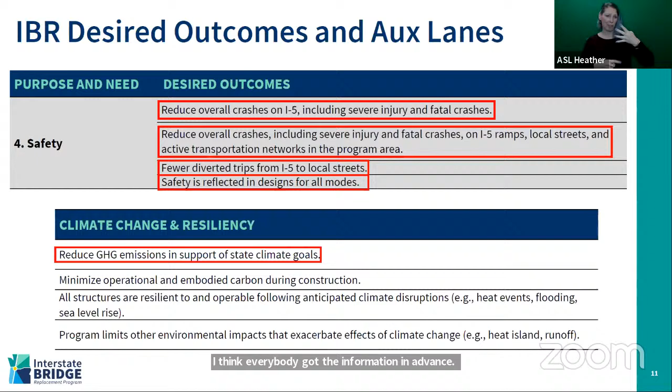Stop for a quick second so the public can see it. So we have the top 4 main purpose and need items. We then have the climate change and resiliency section added here on the bottom. And if you go to the next slide, we have some equity desired outcomes, which again I've highlighted. I'll go through these quickly today. Next slide.

So we acknowledge that ramp-to-ramp connections are not the only way to address these outcomes. In this meeting we're going to focus on the data specific to auxiliary lanes, but we understand there's an overall program approach that looks at a variety of strategies to address these outcomes. For example, in doing some of this analysis, we're already starting to look at how ramp meters and specific ramp metering freeway-to-freeway connections can help reduce congestion and some of those takeaways.

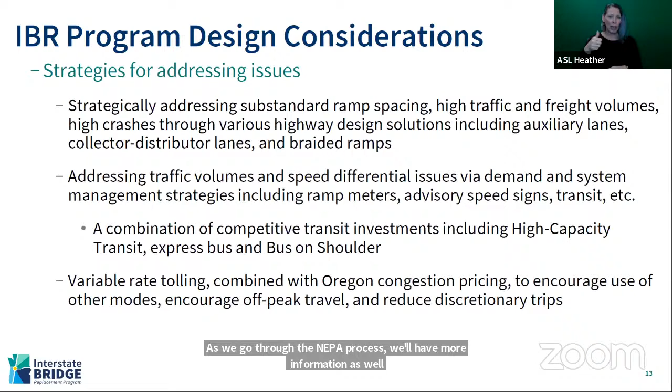So here's an initial list of some of the strategies we anticipate using to address some current purpose and need issues, and some combination of solutions are identified here in the second bullet, including the third bullet with variable rate tolling. As we go through the NEPA process, we'll have more information that'll dive into station access, active transportation potential, trip potential, and additional information on interchanges and ramp information.

That'll be some ongoing work done over the next year. Next slide, please. So now I'm going to get into some background information and traffic design information related to current baseline conditions. Then I'll get into what are auxiliary lanes or ramp-to-ramp connections, and then into the analysis. So it's a 3-step presentation today.

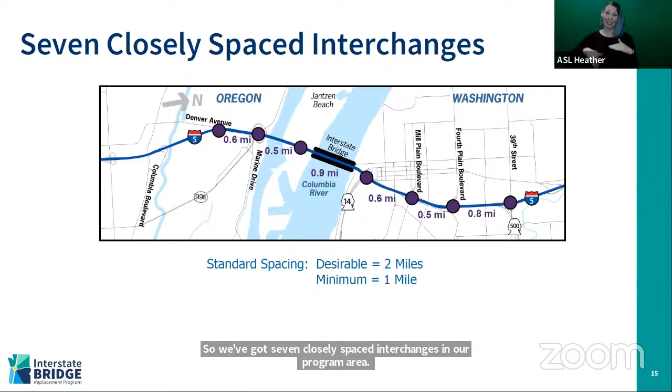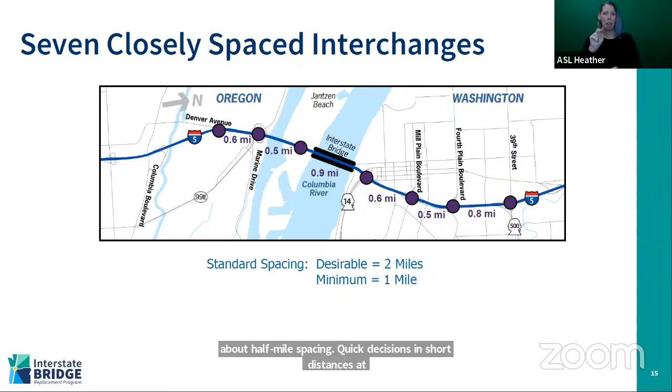Next slide. So we've got 7 closely spaced interchanges in our program area. As you can see, desirable interchange spacing is 2 miles, with a minimum of 1 mile. All of our interchanges are less than that, with many identified at about half-mile spacing. Close interchange spacing requires users to make quick decisions in short distances at high speeds, including reading guide signs, lane changes, and diverging and merging onto and off of the freeway.

For safety and bridge lift, we've actually collected 5 years worth of data as the standard practice. We collected freight information, transit, active transportation, and origin and destination patterns using the bridge, as well as the interchanges just in our program area.

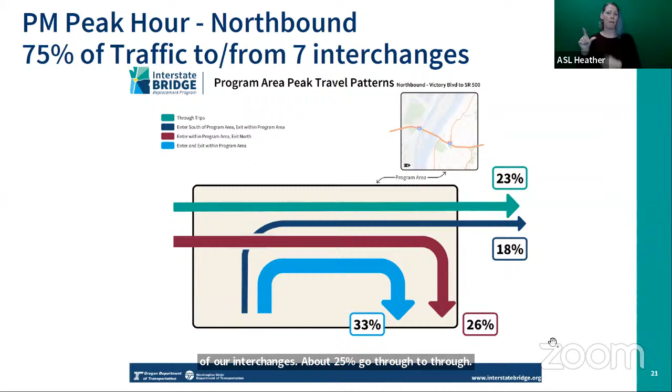Now I'm going to show you some individual ramp volumes. Let me orient you to the graphic. This is AM peak 1-hour volumes. The graphic on the right-hand side shows northbound volumes going up, and the volumes on the left-hand side are the southbound volumes. I've color coded them by ramp type: on-ramps are turquoise and off-ramps are dark blue. The mainline volumes are in black, shown at the top of the screen, in the middle across the river, and at the southern extents. It's important to understand our heavy on and off ramps and which ones those are.

SR 500 at the top has about 2,000 vehicles per hour coming on. Continuing south, Mill Plain brings on about 1,400. SR 14 has about 1,000 vehicles coming on. So really heavy flows coming across the river to destinations south. South of the river, Marine Drive ramp has about 1,800 vehicles getting off, and the Denver Victory Interstate ramp has about 1,000 people getting off. For the most part, AM peak flow is southbound, so I won't talk too much about the northbound flows here.

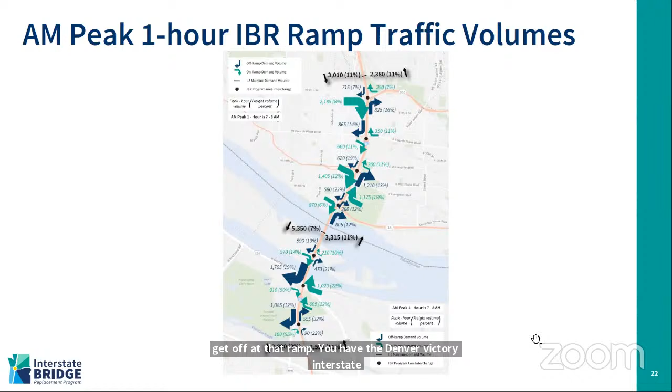Let me orient you to the next slide. These are the existing PM volumes. I want to show you the relative scale of volumes getting on at some of these ramps. We've got a lot of critical interchanges: SR 500, Mill Plain, SR 14, Marine Drive. You can see the relative scale of these flows. These are freeway volumes, not local road volumes - that's the importance here.

Going northbound, starting at the south on the right-hand side of the graph, you've got about 1,000 coming on at Victory Boulevard, and about 1,500 getting on at Marine Drive - full lane worth of traffic coming on at those ramps. Across the bridge, SR 14 has about 1,100 getting off, and the SR 14 on-ramp brings on 1,500. Mill Plain brings on 1,500, and up at the top the SR 500 ramp brings on over 2,000 vehicles per hour. So it's heavy flows getting off - really trying to understand the flows and the patterns.

One other thing to point out: for the most part, AM peaks are southbound and PM peaks are northbound. But there are some ramps that actually peak in the off-peak direction due to their specific patterns or flows. A good example is the SR 14 southbound on and off ramp, which actually peaks in the PM. We use this information to understand the designs needed for the number of lanes at some of these ramp terminals and ramp designs. So I wanted to orient everybody to that. Let's go to the next slide.

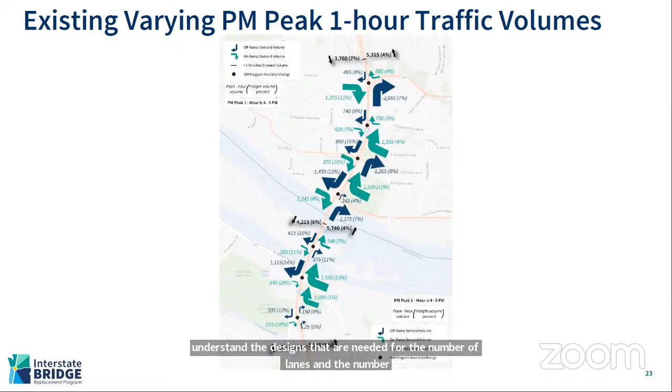Now I want to talk about bottlenecks. We've got 3 bottlenecks that are in the project area or influence the project area. There's a bottleneck at the bridge northbound that lasts 7 hours today, from 12:30 to 7:30. Southbound, similarly at the bridge, there's a bottleneck, but it's only 3 hours. So you've got about 10 hours of congestion at the Interstate Bridge today, in 2019.

The other bottleneck I want to identify is south of our project area on I-5, down near the Rose Quarter and the I-5, I-405 split. There's a current existing bottleneck that actually backs up and influences the project area, so we need to understand that as well. There's about 4 hours of congestion south of the project area that backs up and starts impacting the project area. I'll show you some heat maps or congestion maps later that show this information in more detail.

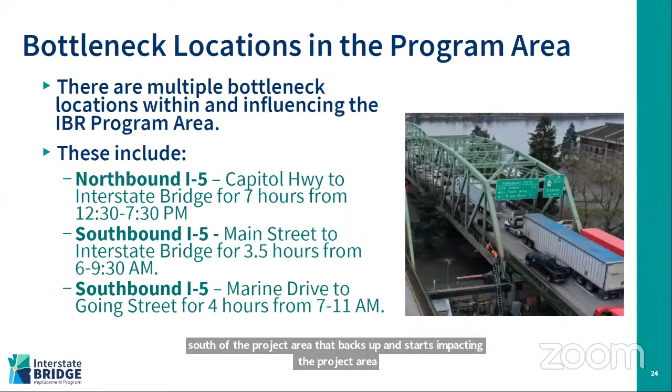The last few things I'm going to get into here in the existing baseline is safety. So we collected, as I mentioned, for our 5-year period from 2015 to 2019, there were over 1,800 crashes.

This is showing you two different charts. We have a chart by hour, how many crashes occurred, summarized by type, and then the by-type crashes on the right-hand side. You start at the top of the pie and work your way around. So rear ends, about 55% of the collisions, are kind of related to heavily congested conditions.

Next, you've got the side swipe being about 20%. Those are related to short merges, weaves, and congestion. You then have the fixed object, about 15%, which are related to substandard features. And then all other crashes relating to bike ped, as well as overturning and other types of crashes, are lumped into that final

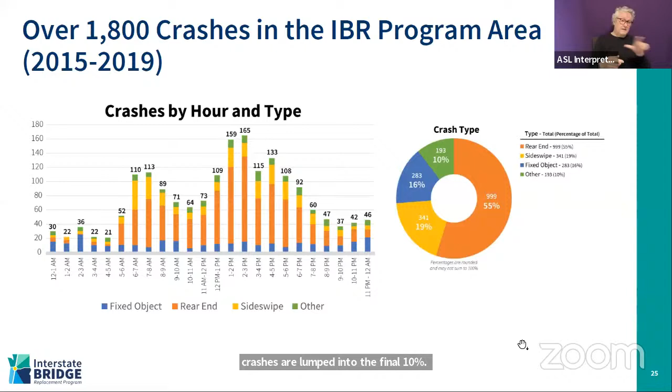10%. The graph on the left shows you how the crashes increase during the congested period. So you see the little AM spike and the PM spike there, where the two little bumps are when the majority of the crashes and the congestion are occurring. But throughout the day, there's quite a few crashes, so about 1,800.

And then we also summarize the same information by severity. So for those 1,800 collisions, we had 7 fatal crashes and 17 serious injury crashes over the 5-year period.

Last slide, please. So the short merge— before you move on, Commissioner Hardesty has a question. I didn't want to interrupt, but if you could go back one slide, please.

You made a statement of fact about the 55% rear ends that is due to congestion. What did you base that statement on?

So I didn't mean to make that a fact. That is a general trend. A lot of rear end collisions, property damage only collisions, are related to congestion. You kind of see the spiking there, Commissioner Hardesty, where on the hourly chart you can see those orange collisions spiking up and increasing. So they typically are related to congestion. So you see that congestion, but even in other periods where there's not congestion, there still is rear end. So I don't want to make that conclusion that is the only thing that causes rear end is congestion. Rear end collisions occur at other times as well.

So yeah, I would say speed causes a lot more rear end collisions than congestion, but I guess that's a conversation for another day. I didn't want that to just be left on the record as if that was fact. Thank you, Commissioner Hardesty.

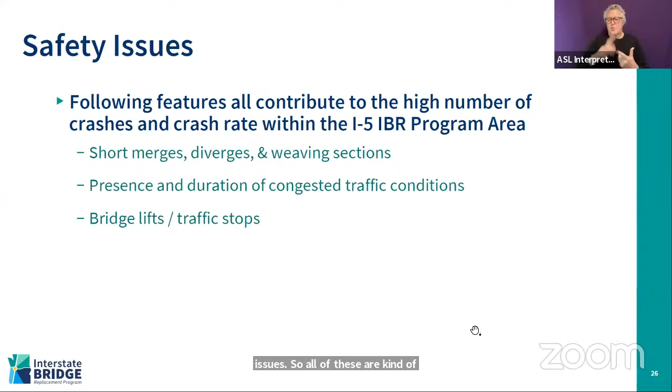So I was going to stop here, Millicent, to see if there's any questions on the baselining information before I continue on. I don't see any hands, Ryan. I'll give folks a few more seconds. I believe we can go ahead.

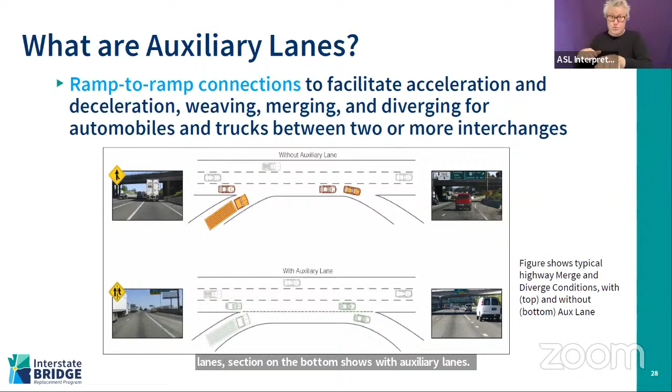We have a section on the bottom that shows you with auxiliary lanes. That same truck and vehicle come on, the truck speeds up in its space and then merges over. I'm going to let the video do a lot of talking for me here. So if we go to the next slide, I've got a video that shows an example for us as well.

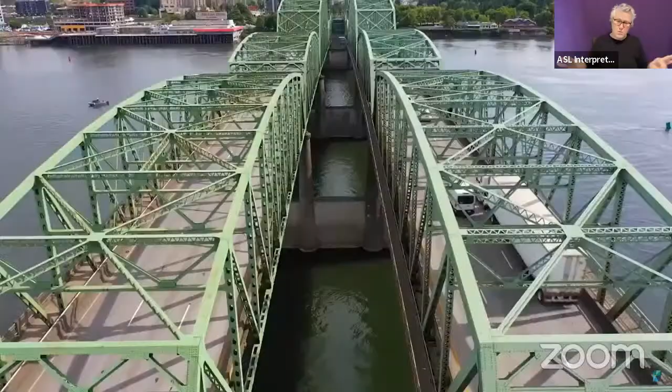The Interstate Bridge provides a critical connection between Oregon and Washington that supports local jobs and families and is a vital trade route for regional, national, and international economies. With over 143,000 vehicles crossing the Interstate Bridge each weekday, the area experiences 7 to 10 hours of congestion, affecting commuters, freight transportation, and public transit.

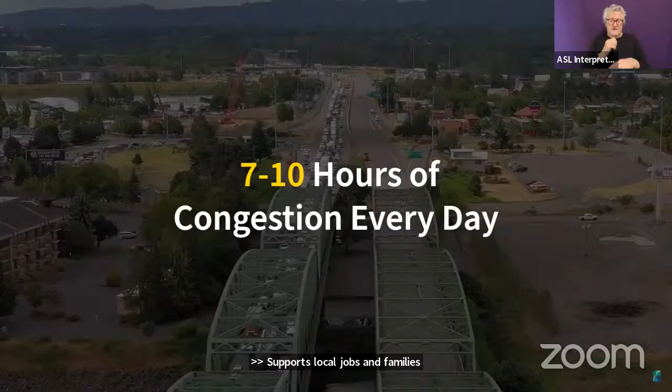Additionally, the area's current crash rate is over 3 times higher than statewide averages, with collisions resulting not just in fender benders, but fatalities as well.

One of the factors that contributes to safety issues and congestion in the Interstate Bridge area is the lack of auxiliary lanes across the bridge and near the surrounding interchanges. Without auxiliary lanes, drivers are forced into through lanes to slow down or speed up as they are entering or exiting the roadway, slowing traffic down and increasing the chance of collisions.

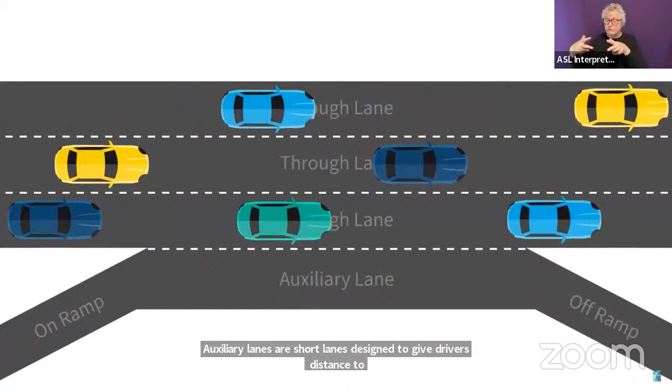Auxiliary lanes are short lanes designed to give drivers distance to accelerate or decelerate before entering or exiting the roadway. They are not through lanes and are not the same as adding an additional lane. They are connections that reduce bottlenecks and optimize traffic flow by giving drivers space to merge safely. This allows for more efficient movement through the corridor, improving safety, helping to relieve congestion with better traffic flow, and reducing emissions from idling vehicles.

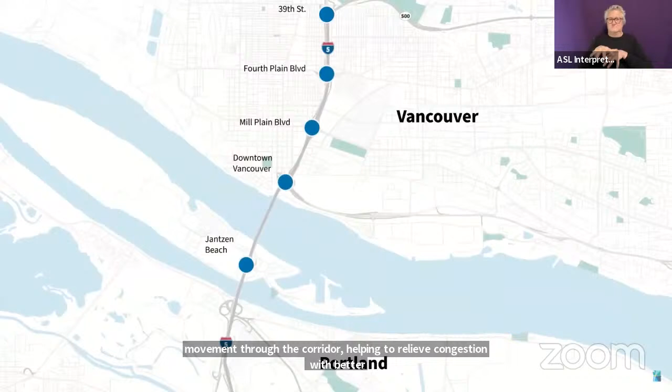There are currently 7 closely spaced interchanges in the Interstate Bridge area along I-5. While the standard spacing for these kinds of interchanges is 2 miles, these interchanges are all less than a mile apart, resulting in substantial weaving and merging for drivers.

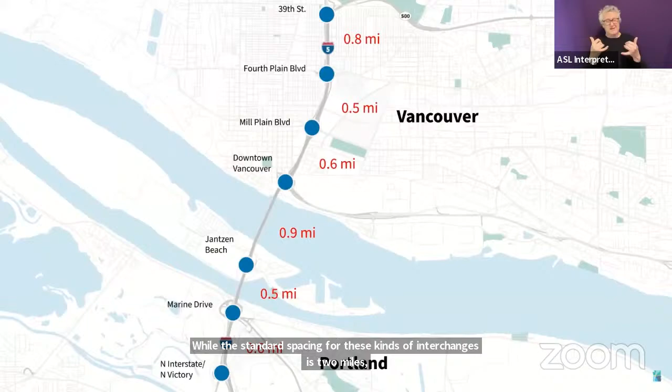Auxiliary lanes are currently being used within the program area, such as along Mill Plain and 4th Plain in Vancouver and Marine Drive in Portland. However, they do not exist on or near the bridge where a majority of congestion and collisions occur.

The Interstate Bridge is a vital piece of infrastructure for our community and the economy. It is imperative that we do everything possible to improve the safety of our roads for everyone.

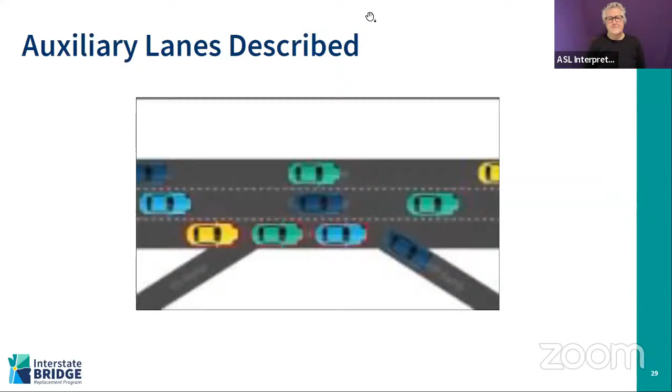So today, the image here kind of shows you an example of context of our program area. The conversation we're focused on today is the number of auxiliary lanes across the river only, but I wanted to show you that they do exist north and south of the project area today.

So in the northbound direction, as the video just showed, we've got an auxiliary lane between Marine Drive and Hayden Island. We've got an auxiliary lane between SR14 Mill Plain, between Mill Plain all the way to SR500. You can see there that it extends beyond one interchange and has 4th Plain add into it in the middle there. In the southbound direction, you've actually got 2 auxiliary lanes that come on at SR500.

As I pointed out, the volumes earlier being over 2,000, that's 1 to 2 lanes worth of volume. So they bring on 2 auxiliary lanes in that location today due to the short spacing between SR500 and 4th Plain. It actually drops one of those auxiliary lanes at 4th Plain. You then pick up a second aux lane again at 4th Plain and drop both of those at Mill Plain.

Similar to continuing south between Mill Plain and SR14, there's an aux lane. Again, nothing across the bridge, only 3 through lanes. And then south of the river, you've got between Hayden Island and Marine Drive, there's an aux lane, and between Marine Drive and Victory.

So wanted to show you that these exist throughout the project area as well as the Portland metro region. There are examples down on the I-405 bridge in downtown Portland, as well as other locations up in Vancouver that have examples of auxiliary lanes. So I wanted to show you these are a common practice that is used in the industry with short interchange spacing.

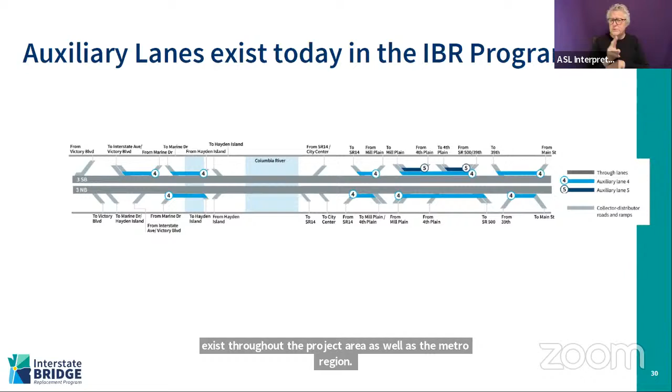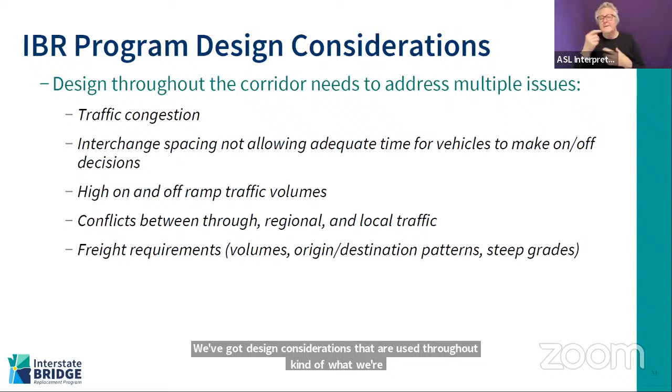Next slide. So I wanted to read through these for you. So we got design considerations that are used throughout what we're thinking about for the IBR program and why we're considering aux lanes and other features to help deal with those baseline issues that I showed earlier in the presentation. We got traffic congestion, about 10 hours today at the bridge.

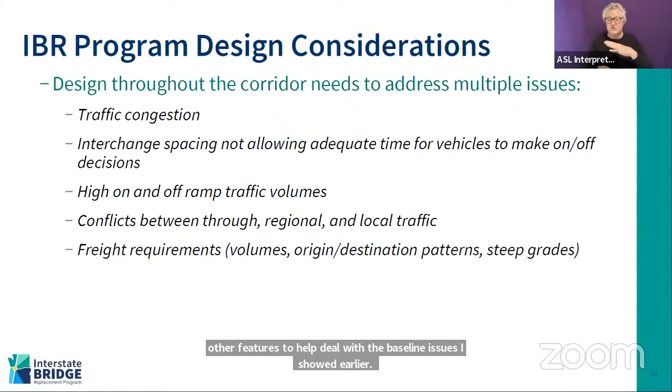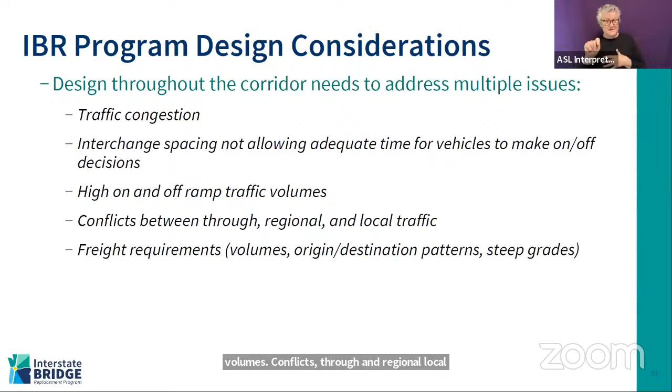We've got the interchange spacing that doesn't allow adequate time for vehicles to make on-off decisions. We've got heavy on-ramp traffic volumes, conflicts between through regional and local traffic, and freight requirements and volumes with origin-destination patterns different from commuters, plus the importance of Mill Plain and Marine Drive for freight.

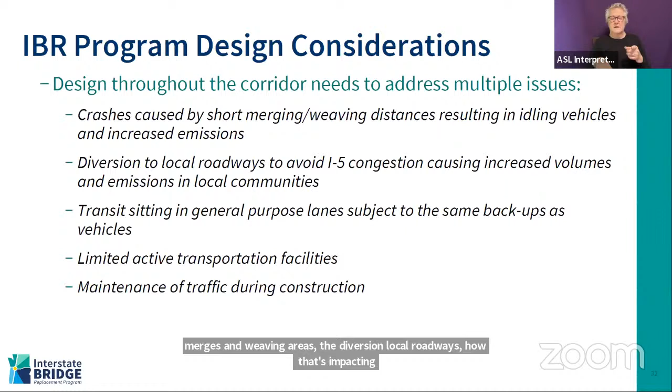We've got crashes caused by short merges and weaving areas, diversion to local roadways impacting local communities, transit sitting in general purpose lanes like single occupant vehicles and caught in the same backups, limited active transportation facilities, and maintenance of traffic during construction, all of which need to be considered in our potential IBR solution.

I'll stop here and see if there are any questions on ramp-to-ramp connections or auxiliary lanes. I don't see any questions, so let's keep moving. All right, perfect, let's go on.

Auxiliary lanes for the IBR are proposed to address close interchange spacing, as most are about half a mile apart. We've got short merges, weaves, and diverges. An example is the Hayden Island on-ramp, which has about 150 feet of acceleration length, while the standard is 1,500 feet—so you get about 10%.

What occurs there is vehicles come on and have to make quick decisions. Often vehicles stop on the ramp or on the freeway to allow merging to occur, which leads to a lot of our collisions in the program area.

We've got high on and off ramp volumes—I've shown you SR500. Another example is Marine Drive, at about 1,400 to 1,800 vehicles per hour. We've got the heavy vehicle crashes I showed you, summarized overall for the project area as well as by location, so we have that information.

The last one is we're trying to minimize the required number of lane shifts needed for vehicles when they come on and are getting off at the next ramp or a state route. So I wanted to identify that as well.

Next, I want to get into future volume predictions. We're using the travel demand model to forecast future patterns. The IBR program uses the demand model produced and run by Metro and RTC for the 4-county region, based on the 2018 adopted regional transportation plan, including projects assumed to occur by 2045, such as the IBR, Rose Quarter, Division BRT Transit, etc. All of those are inclusive in our future 2045 numbers.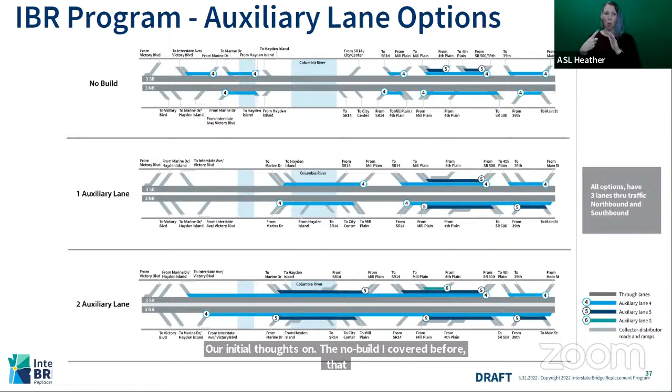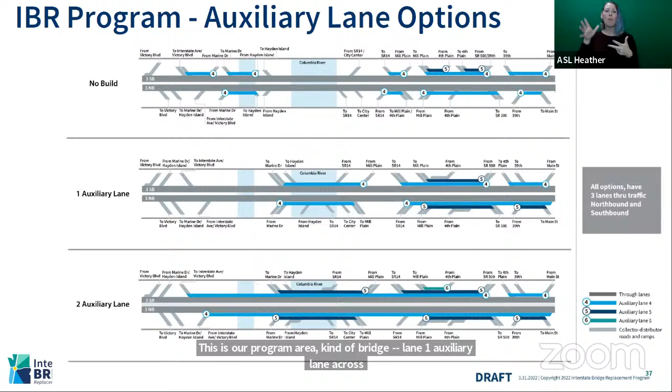We then have a one-auxiliary scenario that has one aux lane across the river—you can see that in the middle, north is to the right, this is our program area again. To bridge, you add one auxiliary lane across the bridge. We then have the two-auxiliary-lane scenario on the bottom section, where you pick up the one aux lane, fill in the gaps, and the second aux lane comes on at Marine Drive and drops at Mill Plain, with the reverse in the southbound direction. So those are the main differences.

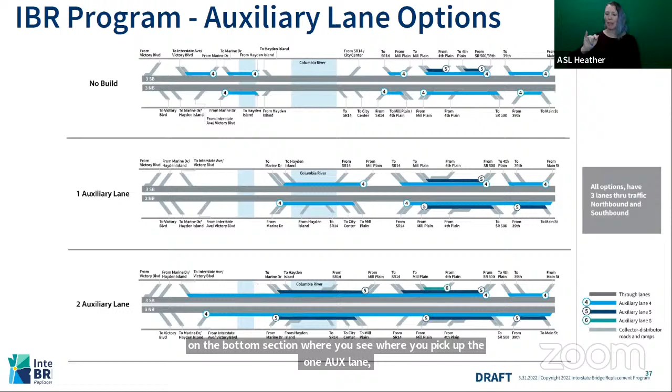I'm going to go into the operations now and the results. So let's go to that, please. There's a lot on here, so I'm going to give us an orientation to the graphic, then I'll get into what the data is, and then we can get to some conclusions after.

So we've got these for a no-build, a one-aux, and a two-auxiliary-lane scenario. On the top is the graphic—this is the no-build, the base case. You can see the map on the top. We then have performance metrics for equity and climate. We have a travel time metric showing results for different pairs. We then have daily mode share as well as PM one-hour mode share in brackets below that. I'll walk you through all this information in a minute.

We then have a congestion index, which relates to the heat maps on the right-hand side. Those heat maps show the speeds vehicles will be traveling through the corridor area. AM southbound is the top row, southbound PM is the second row. We then have northbound split into two sections on the bottom, with northbound AM being the third row and northbound PM the bottom row. Darker red is slower speed—dark red is less than 20 miles an hour, orange is 20 to 30, yellow is 30 to 40, light green is 40 to 50, and dark green is greater than 50. Imagine things like Google Maps showing the speed you're going in an area.

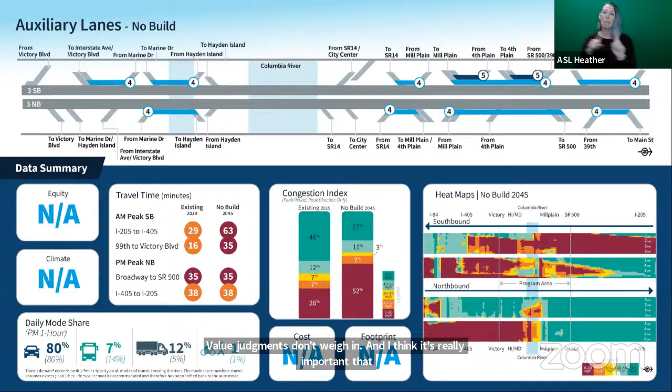Thank you. And Metro, I'll jump in real quick one more time. Metro and RTC have user surveys that they go out and collect, gathering information on how you make choices, Commissioner Hardesty—I need to go from this place, how many trips do I take, do I always take my vehicle, can I take transit, can I take bike-ped? That information is fed into the model, the model is calibrated, and then they predict future changes like you're getting at. So those are assumed in the model—it's not that what was done last year or ten years ago, those patterns must maintain into the future. They do make adjustments, as you're kind of hinting at.

So let's go to the next one. I know we're trying to race through a lot of information, and I'll get into some summaries. I'll just keep orienting us to this, and then we've got some large conclusions. I think you saw in the PowerPoint slide deck that roll these up, but I'll orient us again.

To the aux lane, one aux lane scenario here—again the map is on top, same measures are highlighted. Equity is summarized where you're increasing modal options. You've got climate with some identifiers of change. You've got the daily mode share down on the bottom, showing the change for the one auxiliary lane. You've got travel times again showing existing—now including both the no-build and the one auxiliary lane scenario. You've got a congestion index showing both the existing, no-build, and one scenario. The heat maps on the right-hand side are for the one auxiliary lane scenario.

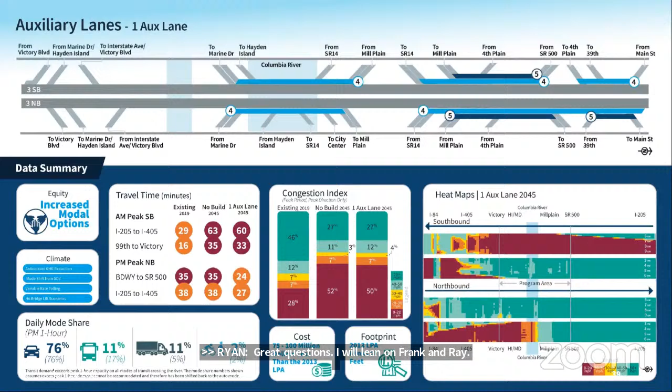Those are great questions. I will lean on Frank and Ray to jump in and help me with that one, but I want to get back to your first one about the impacts to local streets. That is a good point. I did want to point out these are just showing the freeway main lines. There will be backups at the interchanges with these conditions, and we don't have that completely summarized to date, but that'll be information that'll be summarized in the impact analysis, NEPA analysis. That's a good question about the asymmetry question too. So I might let Frank and Ray speak, I know we've considered it and I've been thinking about it. The other thing we need to understand here is maintenance of traffic during construction, so how to maintain operations during construction. That's an important fact that's not on these summary sheets, but we will discuss that for sure.

Yeah, and I'll jump in real quick, Ryan. I think you just summarized it very well. That's what I was going to say, that as we started seeing some of this data, that is absolutely a question that we started thinking about: does it need to be symmetric, or can you look at maybe the benefits of different aux lanes in each direction? I think we need to look at that throughout the corridor. As Ryan said, there aren't the same amount of aux lanes everywhere. So as we're looking at the volumes and moving forward, that's definitely something we're open to studying. So thank you for that question.

We have two more questions. That added a few more questions, yes. Sorry. Secretary Millar, and then CAG co-chair Lynn Valenter.

Yeah, when we have this conversation about aux lanes, I don't think it really ought to be about congestion as much as safety. The video that we saw earlier and all the discussion leading up to this was about aux lanes reducing crashes. It's rather apparent looking at the congestion index that aux lanes don't do a heck of a lot for congestion. So does it reduce crashes there at the bridge?

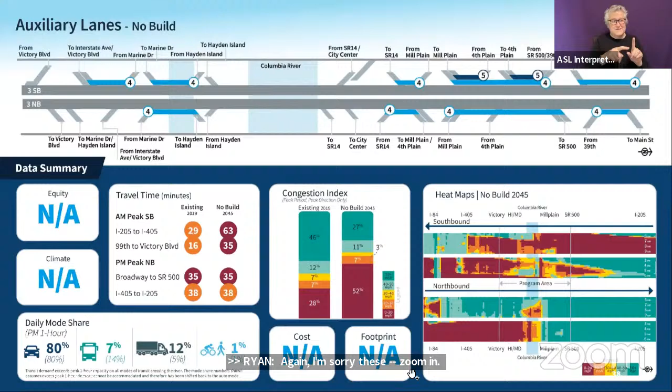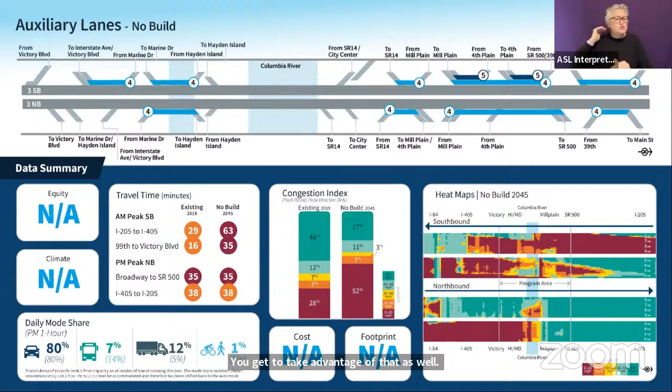So transit demand is over capacity in these. We're providing so much demand that it's more than what can be served. There's a footnote on the bottom noting this is talking about just the amount that can be served. The other thing to note is the no build is an increase over today's transit, since CTran and TriMet are doing a lot of improvements planned out to 2045 no build, so you get to take advantage of that as well. In both of these cases, you're trying to shift more, but there's already too much demand over service, so we've capped these at service. So the service is similar, but there is a difference.

And I think if you look at the peak number in the brackets below, there's a little bit more of a difference, but I agree with you, there is a small shift between the amount that you can serve between the scenarios.

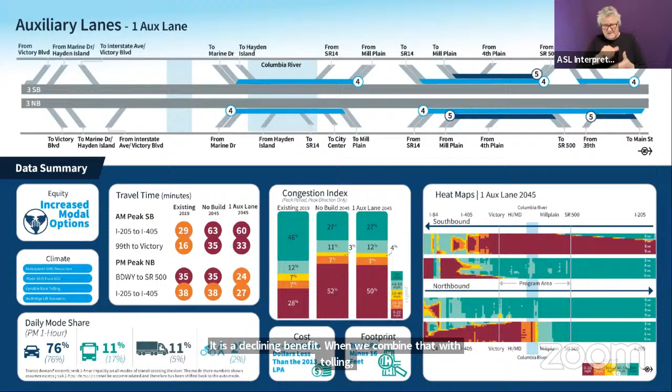So when you add one aux lane, you get a big benefit. When you add the next one, you don't get the same incremental benefit, it is a declining benefit. So when we combine that with tolling, what is the sensitivity on that second aux lane? What is our confidence that it actually has the benefit that we believe it to have? Does that make sense? It does.

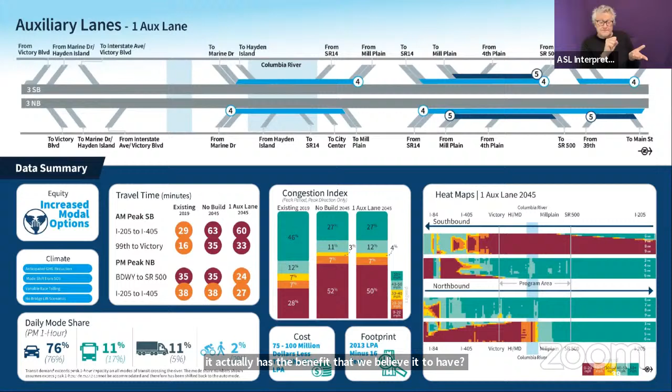I'm going to push you just a little bit. I don't know if they're equal. I think if you were talking through lanes, I would think each through lane would be considered equal, and you kind of go down to the disproportional benefit. I'm not talking through lanes, I'm talking aux lanes, that's what we're talking about right now. The question is the sensitivity of how the tolling affects the need for each additional aux lane.

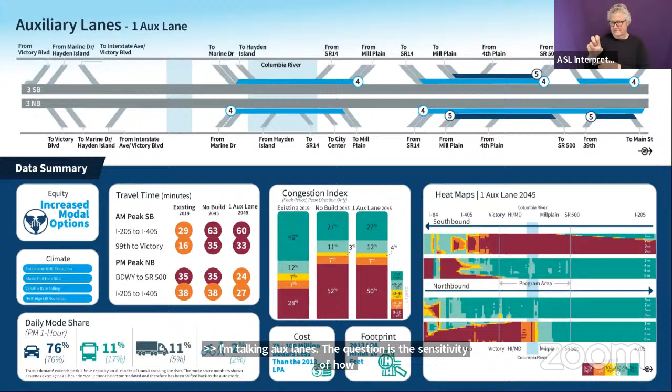Maybe we go to the next slide, and I'll show you the difference between the two lanes. We haven't gotten to the two-lane yet, and I'll show the differences in the heat maps and congestion. Then we can come back to the tolling question. Is that okay? Yeah, thank you. Let's do that, and we'll try to come back and answer your question.

So wanted to get through this. I know we're running behind, Millicent. So this... You're good, you're good.

Okay, so this is the two auxiliary lane scenario. The plot on top shows where those lanes are added and where they drop. We've got the same metrics on the bottom: travel time benefits and daily mode share. The daily mode share is similar between the one-aux and two-aux scenarios, as I discussed, since we're capped out at service. So you get the same general mode share, both daily and peak.

Travel time benefits, you can see the change and improvement with the two-aux compared to the no-build, which we'll go back to and bounce between.

I think we might just skip the bullets and let you guys read them, and go to the overall summary in a minute. But if you look at the heat map in the bottom right corner, the northbound PM peak has a large difference from what you saw in the one-auxiliary-lane scenario. Southbound AM, the top row, is pretty similar, slightly less congestion, but a similar case with the downstream bottleneck backing up to the north. But the northbound PM shows large improvements in congestion, and you see that in the congestion index in the middle. Then in the travel time summary bullets, that's where you see your main travel time savings in the PM peak, and also a small difference in the AM peak timeframe.

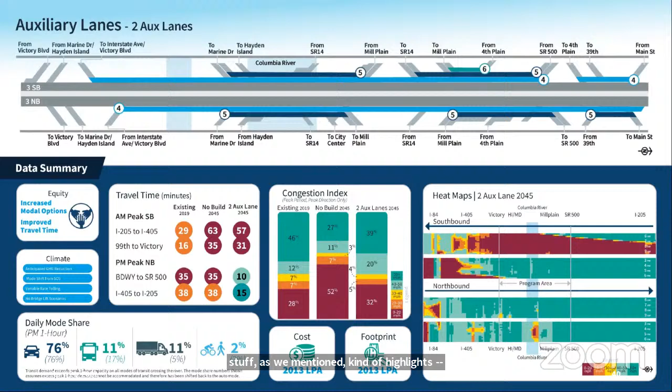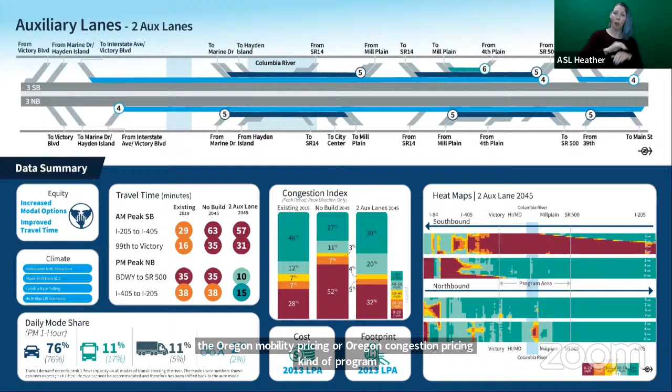So the tolling sensitivity stuff, as I mentioned, I went through the highlights earlier. We've tested different scenarios of higher toll rates, those same two toll scenarios, plus the regional mobility pricing, or Oregon congestion pricing program included. There were main trade-offs where sometimes you reduce volume on I-5, sometimes you actually increase volume on I-5, which gives you that sensitivity you're getting at, President Peterson, about volumes going up and down. The other component to consider is the transit portion, the forecast for transit, and the amount that can be served and demand. So there is kind of sensitivity.

The aux lanes, as Secretary Millar got at, are really trying to help with the safety of the short interchange spacing and heavy on and off ramps. A lot of the volume, as I showed with the origin-destinations, gets on and off at ramps, so there's not a lot of through traffic. I don't know if I'd call it chaos, but people get on, drive through the aux lane, and get off at their next state route—that's their ultimate goal. So hopefully that answers your question.

No, I mean, comparatively, I understand where we are in this study. And I guess as we move through, I'm going to want to see the traffic operations impacts, not just the planning level overview. I think that's going to be really important to zero in on what we need and what we don't need for the future, and what the benefits and trade-offs are. So while I appreciate it, and I know where we are in the study, I think we're going to need a little bit more information to be able to make those trade-offs.

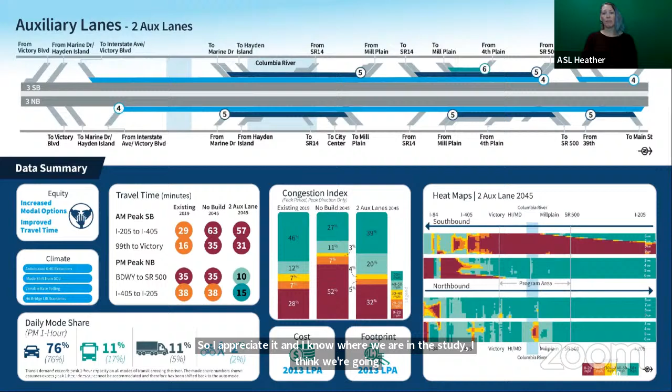These are the main conclusions from either one auxiliary lane or a two auxiliary lane trade-off compared to no build. You get the modal choice benefits of high capacity transit, bus on shoulder, and active transportation. You get variable rate tolling, reduced overall congestion, and off-peak benefits, including weekends.

There's less diversion to local streets, and you get faster congestion recovery from crashes and incidents, with fewer lane changes required. You get the safety benefits of full lane widths matching current vehicle widths, turning and comfort standards, fewer sideswipe crashes, full shoulders to allow bus on shoulder and recovery from breakdowns, improved visibility, and no bridge lifts. Those are some of the major safety improvements in either the one or two auxiliary lane options compared to a no build.

Next slide: benefits of one auxiliary compared to the no build. You get some travel time benefits as highlighted on the previous graphic, and reduced congestion. Congestion is similar, but there's some reduction in off-peak periods with the one aux compared to no build. You get the safety benefits we just discussed, and a modal shift—you can see the increase between the no build and the mode shift projections with the project. You also get climate impacts and improvements from anticipated GHG reduction, and increased modal options for equity.

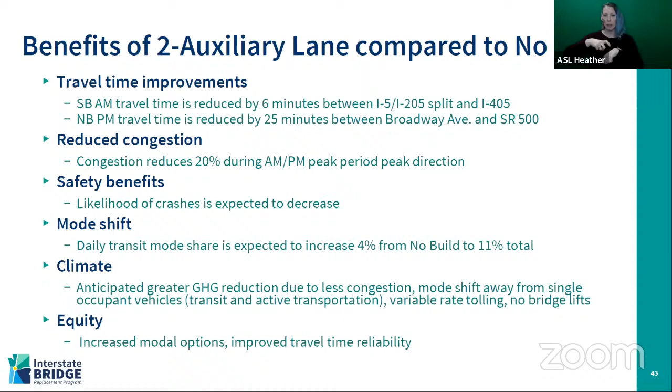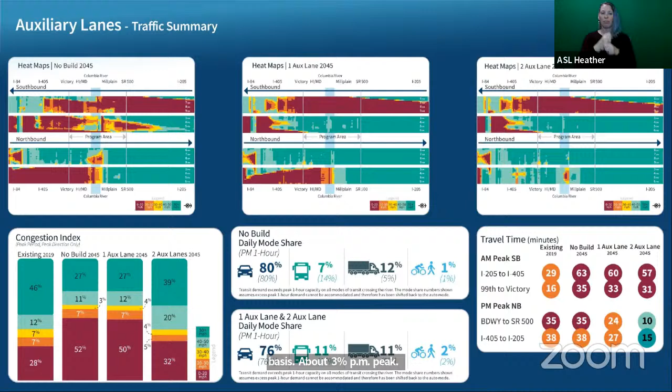Mode share: we've got the no build there, and then the one aux versus two aux, mode share daily versus PM one hour summary. You see that improvement in transit, about 4% on a daily basis, about 3% in the PM peak. And then we've got the congestion index on the bottom left-hand side summarizing the heat maps. I'll stop there and see if there are questions.

Do we have any additional questions? I know that was a lot of information. I see Matt Ransom's hand is raised.

Matt? Yeah, thank you. First off, to the group and those watching, I mean, Ryan, I know what you're doing. I trust what the team is doing. I'm very familiar with our piece of it at the RTC side and Metro's piece and the forecasting.

But I think, as Secretary Millar pointed out, these are all tools. The forecasts are very prescribed methodologies to estimate the future, but it's not an absolute prediction of the future. They're all relative to each other. I think it's important that we keep that in mind, also those that are watching and have an interest in this topic.

So I think what you presented in that last slide, the one that puts them all together, is an amazing illustration of the trade-off. Certainly the 2-aux lane uncorks that northbound traffic in a very profound way, but that's only for that sort of element of this discussion, which is traffic performance and the associated components.

I tend to agree with what Secretary Millar said, which is if there's a fundamental public purpose here, and that's to increase safety and promote safety on the system, certainly the highway system being a very risky asset. People drive fast, have high speed maneuvers.

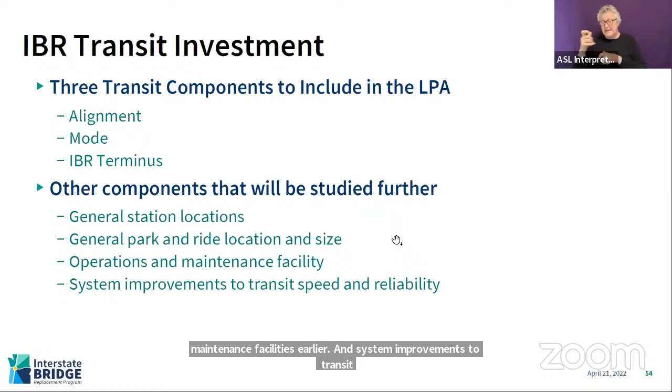Let's go ahead and jump into mode. We'll start by looking at the modes considered for program investment: bus on shoulder, looking at C-Tran's current express bus routes and how they can operate through the program area; bus rapid transit; and light rail transit. Bus on shoulder was considered as a standalone mode, but was also considered additive to the two other options as we modeled and looked into the future.

Bus on shoulder is a transit investment that serves the identified markets and attempts to serve demand. It would need to include a combination of bus rapid transit, light rail transit, and express bus. So to serve that, we need more than bus on shoulder. The bus on shoulder capability is included in all representative investments, so since it's in the other options I'm about to talk about, we've removed it as a standalone option for consideration.

Bus rapid transit and light rail transit, how do they compare, again for that component of the cross river connection? When comparing the same representative alignments, light rail has higher demand than bus rapid transit. You can see the difference in vehicle capacity between both. Another factor affecting demand is the additional transfer needed for bus rapid transit when traveling further north or south than Expo. That creates travel time, and the models take a look at time and economics to predict that transfer impact. It affects demand for bus rapid transit options more compared to the C-Tran express bus option between downtown Vancouver and downtown Portland.

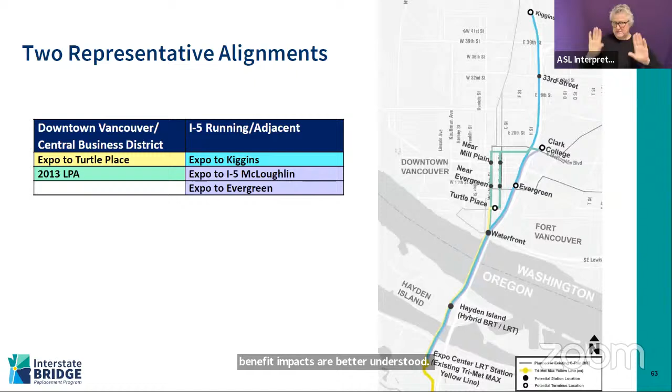Okay, we'll discuss alignment. I did mention the work that C-Tran and the City of Vancouver have done, and that's something we can talk about here. You can see on this graphic all the representative investments shown.

They really shift into two major alignments. One runs through the central business district on the Washington and Broadway couplet—traffic nerds like to call couplets two one-way streets. That includes the Expo to Turtle Place option, which took us across the river into Turtle Place. You can see that on the graphic in yellow, as well as the green 2013 LPA, which ran all the way up to roughly McLoughlin and terminated near Clark College.

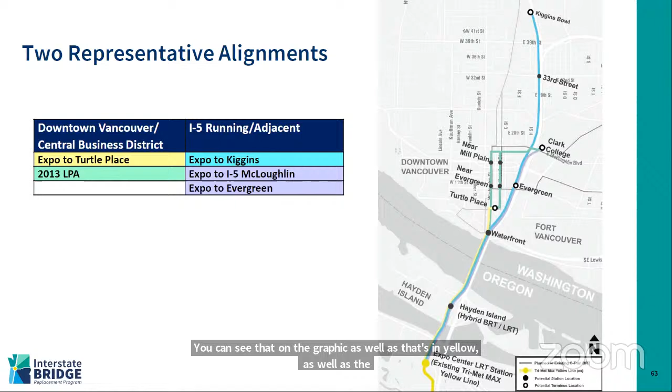The options that run adjacent to I-5, what we call I-5 hugging, include the blue line that takes you all the way to Kiggins. Looking at all our investment options, the Expo to I-5 McLoughlin and the Expo to Evergreen are shown along that purple line. It's pretty hard to see as all the alignments are right on top of each other.

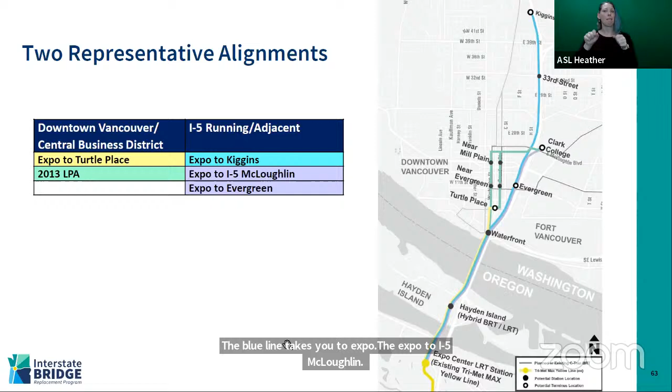So those are the two big areas we're looking at as far as where this alignment can run when considering investments. Let's go to the next slide.

The real takeaway is that any transit investment should be made with a desire to complement the C-Tran Vine system, including existing and planned service. I mentioned one BRT line in operation, the Fourth Plain line; one just started construction, the Mill Plain line; and one in planning, the Highway 99 alignment.

The Vine and C-Tran Express bus service provide frequent and reliable service within Clark County and to downtown Portland, respectively. The City of Vancouver has worked with C-Tran to create robust station environments for the Vine system in the central business district. Let's go to the next slide.

The other thing we want to do as a program is support Vancouver's land use and development goals. Significant investment in downtown Vancouver has occurred since the 2013 LPA, including the aforementioned stations, as well as the work along the Washington Broadway couplet and the frequency of those routes. I think we can say the addition of light rail infrastructure would duplicate that service and have pretty significant impacts.

The I-5 alignment has fewer potential property impacts than the 2013 LPA alignment and integrates with transit-oriented development. There are opportunities at Library Square, where Evergreen is, and the nearby city-owned parcels. In addition, a connection over I-5 between Library Square and the Historic Reserve has potential to create a significant opportunity to integrate transit into an active station environment that connects to key destinations.

Let's go to the next slide. We put a big red circle on to emphasize that of the two main alignments—one that runs through the central business district and one that runs along I-5—I-5 has created the best investment opportunity.

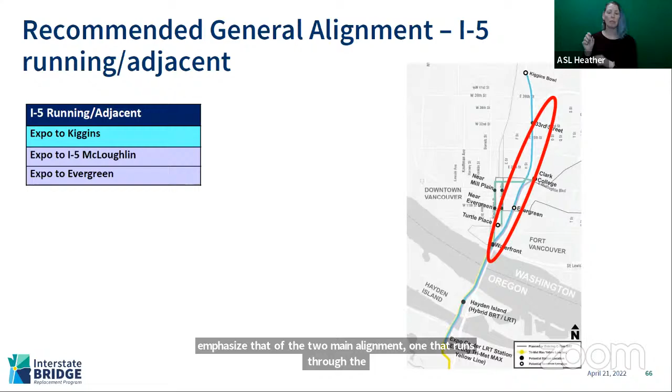As we go to the next slide and start looking at these building blocks, we're looking at the mode across the river, light rail transit, the alignment, I-5 running adjacent, and a terminus will be next. Please be reminded we'll continue to refine these components as design advances and benefits and impacts are better understood. So let's talk terminus.

Need a drink of water.

The IBR terminus has fewer potential impacts if you go to Evergreen than connecting further north, again noting the connectivity of Evergreen with the jobs, services, and amenities it provides, as well as transit-oriented development opportunities. An Evergreen terminus maximizes transfer opportunities given the direct connections to several local routes, as well as planned bus rapid transit routes, so there's a lot of connectivity there.

Evergreen also connects over I-5 to the Historic Reserve and west through downtown to Main Street and Esther Short Park via the planned 9th Street pedestrian way. So there are a lot of ways to access at Evergreen. Let's go to the next slide.

The preferred transit investment looks at light rail, I-5 adjacent, and an IBR terminus near Evergreen. As we go into the NEPA process, we will be able to look at impacts and opportunities and understand how we can optimize and refine that design, looking at both access and connectivity with existing services north and south of the river. Let's go to next steps.

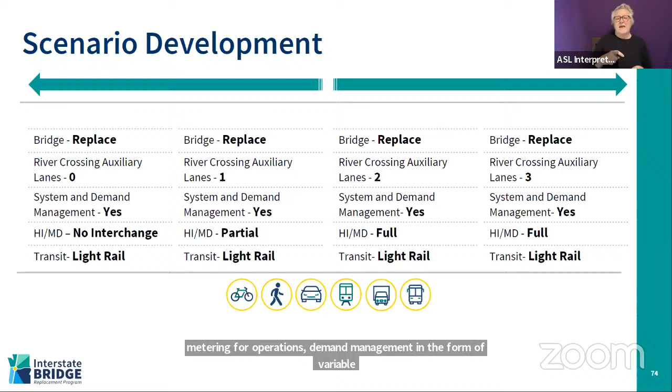On all of these scenarios, we're also going to look at system and demand management - things like pricing for parking, ramp metering for operations, and demand management in the form of variable rate tolling. We're also going to look at transit on all of these. Given the presentation we just gave, we've chosen to keep that transit investment constant through all scenarios: light rail across the river, I-5 adjacent, with an IBR terminus at Evergreen. That said, we are looking to vary some things so we can ask those what-if questions and understand what they mean.

That variation looks at going all the way from zero auxiliary lanes to one and two, as Ryan showed you today - these are in addition to the three through lanes in each direction - all the way up to three auxiliary lanes, which was studied in the prior planning effort. The other big change would be Hayden Island and Marine Drive, ranging from no interchange to a partial interchange to a full interchange, again looking at this continuum or spectrum.

We've taken a deep dive on the interchanges, the interchange at Hayden Island Marine Drive, which was a change since 2013. We just finished looking at auxiliary lanes. When we look at this holistically, our team looked all the way to the left at the 0 auxiliary lanes and no interchange option, and found that didn't meet the purpose and need. We've talked about that at prior ESG meetings.

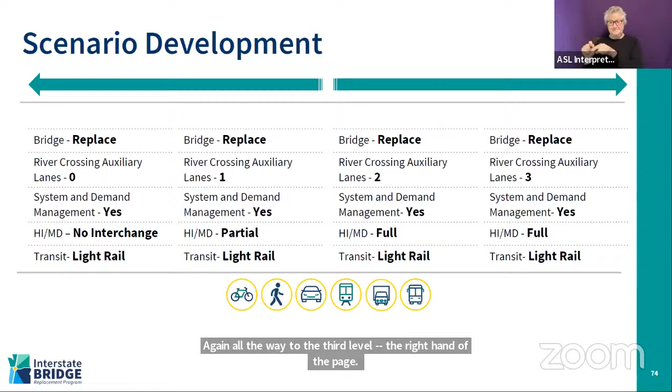Again, all the way to the third level, the right hand of the page, 3 auxiliary lanes and full interchange. As we've looked at the footprint of the program and the right-sizing that we as a program have promised to do, along with climate and equity, we realized that given footprint and climate concerns, 3 auxiliary lanes on the other end of the spectrum and full interchange should not be moving forward.

All right, that was lightning round speed. Does anyone have any questions for John on the options we're proposing to discuss as we move toward making the final identification of the locally preferred alternative we're going to recommend?

Okay. Okay, thank you. There we go. I knew I needed to wait a few more seconds.

President Peterson: Thanks, I just want to say thank you for really starting to think about these scenarios and bringing them before us. The IBR team has been really awesome to work with in order to start thinking about how these elements can work with or against each other. While we're all trying to make sure we identify a project that can meet the purpose and need and balance the need for more connections with our desired outcomes for racial equity and climate change, we knew from the beginning, or restart, of this project that it will have to achieve multiple outcomes. So being able to see all of these options certainly is important.